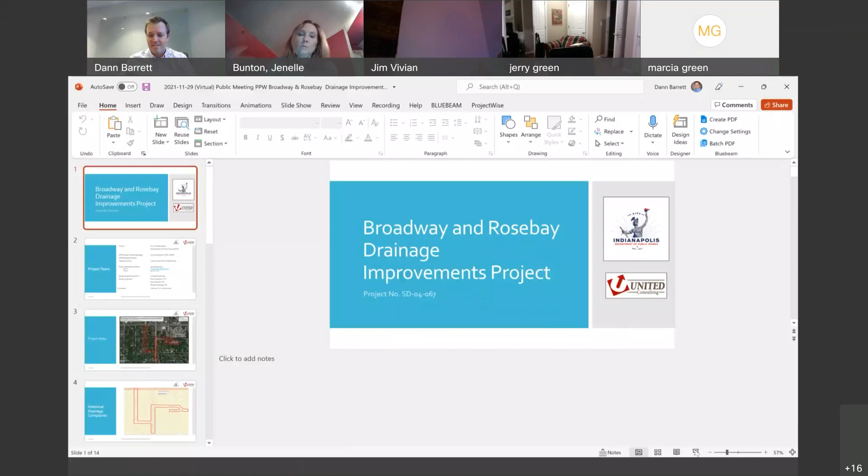Thanks, Dann. So as Jenelle and Dann kind of walked through, on screen you can see the team that composes the construction side and design side for this project. Just to add a couple more names, Leslie Jones with HWC Engineering is going to be the resident project representative, meaning the person on site for construction. As Dann mentioned, this project has been bid and awarded, and the contractor working this project is Calumet Civil Contractors. We don't have a contact person yet. We have a pre-construction meeting coming up next week to finalize the schedule and the personnel who will be on site working for this project.

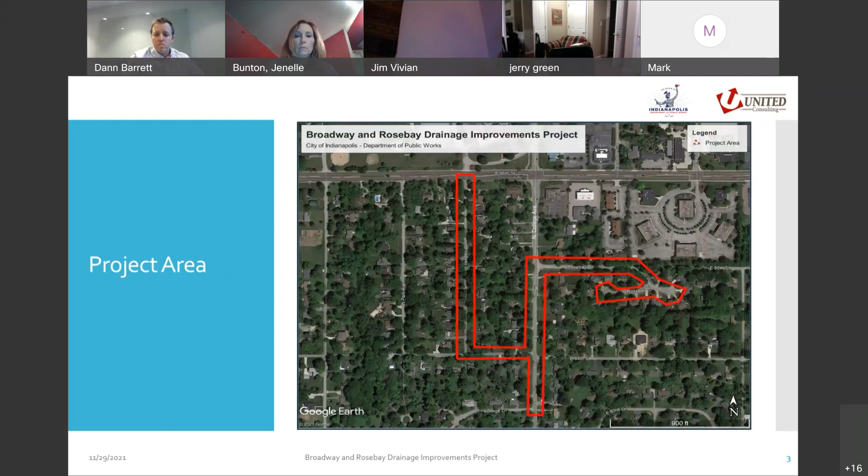So to give an overall view of the entire project area, we're going to be working primarily on Broadway Street between 86th and 84th Street, on 84th Street between Broadway and College Avenue, and on College Avenue between College Lane and Rosebay Drive, and the entirety of Rosebay Drive and Rosebay Court.

So how did we come up with this project area? Thanks to information provided by DPW and the resident log of complaints residents have made calling the mayor's hotline, we were able to take that information and do an on-site visit after storm events happen. With that data, we could understand where the focal points are that we need to address, and what the current drainage situation is for the site. For reference, Broadway currently has two-thirds draining south to a private drain located on the south side of the intersection of Broadway and 84th.

That eventually connects through private drainage and discharges to Holly Creek just south of College Lane. The northern third goes to 86th Street and follows roadside ditches.

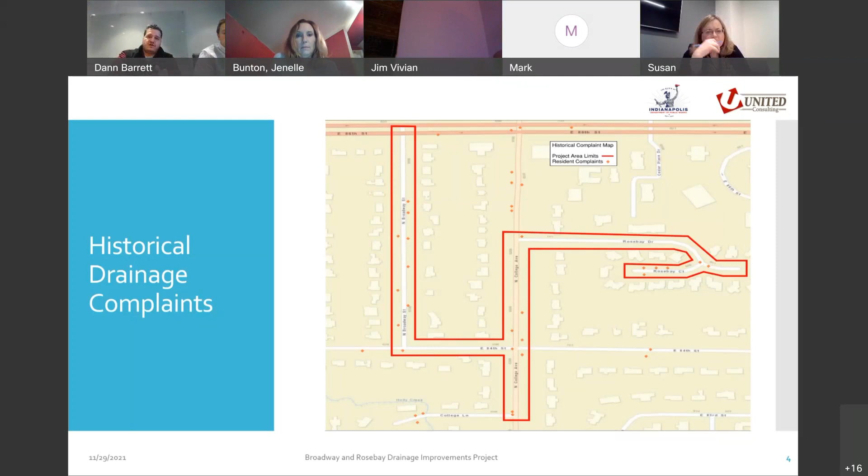These are some of the pictures we took during an on-site visit. This is Rosebay Court. As you can see in the images, there's a lot of ponding happening at the inlet where water is supposed to be draining through a pipe network system. On the right picture, we see ponding happening between two residences, even flooding into the nearby driveway. There's clear indication that action needs to be taken and a proper system has to be put in place to get that water moving from those locations.

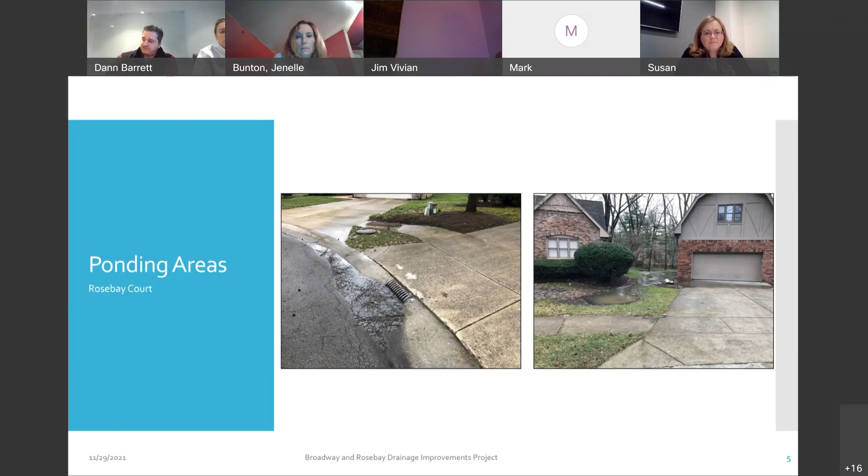Here we're looking at Rosebay Drive and College Avenue. Once again, we see water backing up on the left picture in the roadside ditch, almost overtopping it or getting close to the top, just at capacity or more. On the right picture, we see water just ponding on the road itself. Again, indicators that water is not going the way it's supposed to, hitting the locations it needs to reach, away from vehicles and pedestrians.

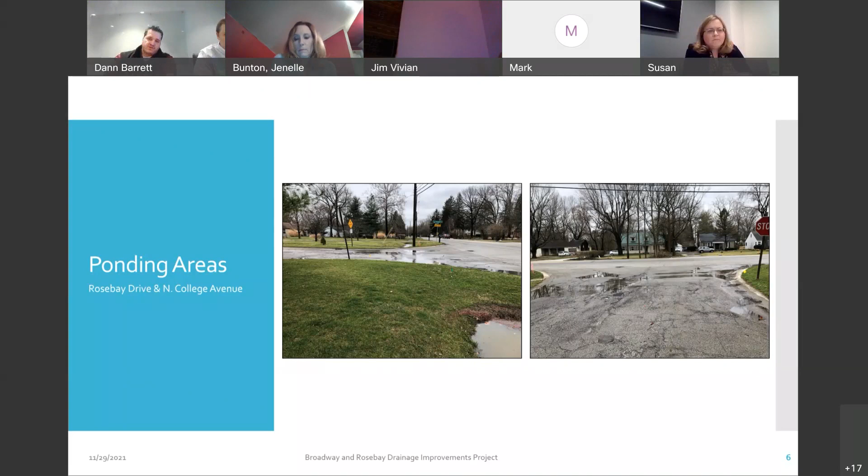What we see here is 84th and Broadway. Once again, water ponding in front of properties. There is an outlet opportunity close to the intersection, but due to lack of grading and insufficient entry for the water to drain into, water just ponds in front of the properties.

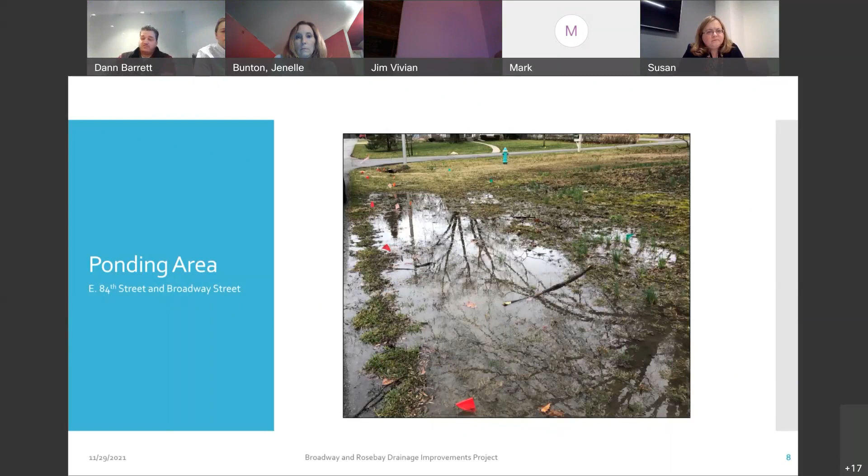Here again is Broadway Street. The GIS and the survey indicated that there is an existing system. Most of it might be plugged or not sized properly, therefore causing a lot of ponding happening in front of property owners.

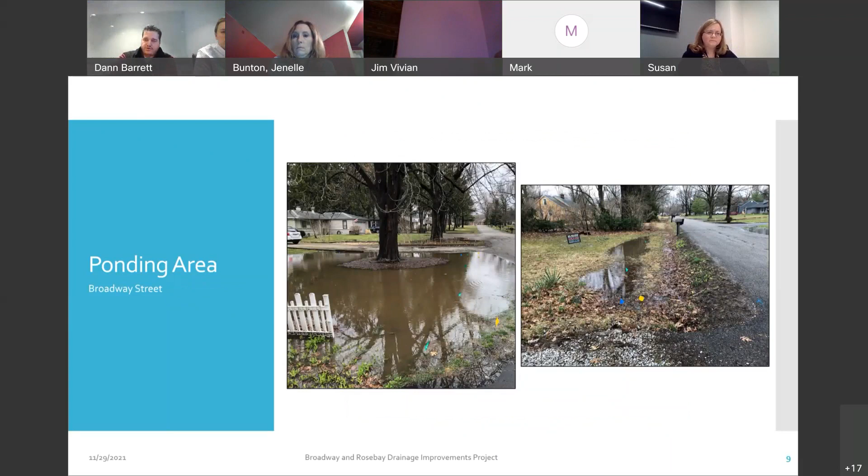All of this eventually drains back to the 36-inch pipe that runs on the west side of College and goes down to Holly Creek.

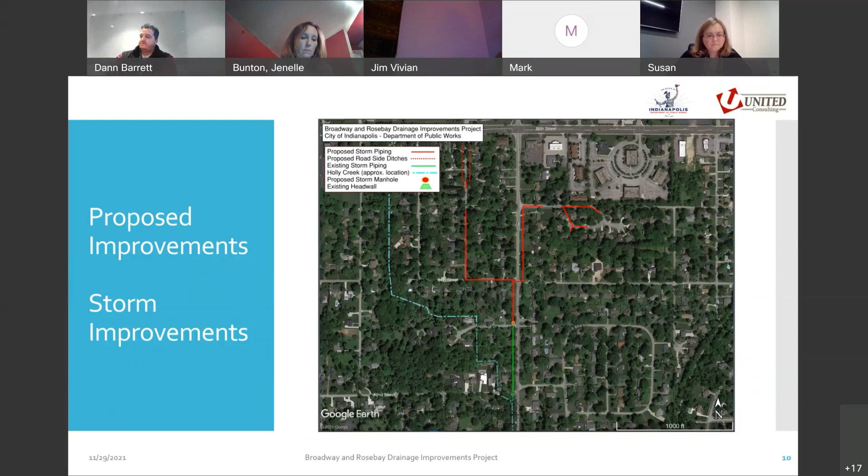One thing we want to note: through the construction, we will be utilizing an existing 20-foot drainage and utility easement that connects Rosebay Drive and Rosebay Court. We were looking at different alternatives, and this turned out to be the best solution for the proposed project with the pipes. There is a lot of conflicts happening with utilities, which we are working through, and we've notified all the utilities, so it's been an ongoing process with constant communication through that corridor.

As well, behind these properties, there's existing swales. Those are not going to be touched or modified. Those are going to remain in place. They're just going to stay there through the construction. No modifications will be happening to those.

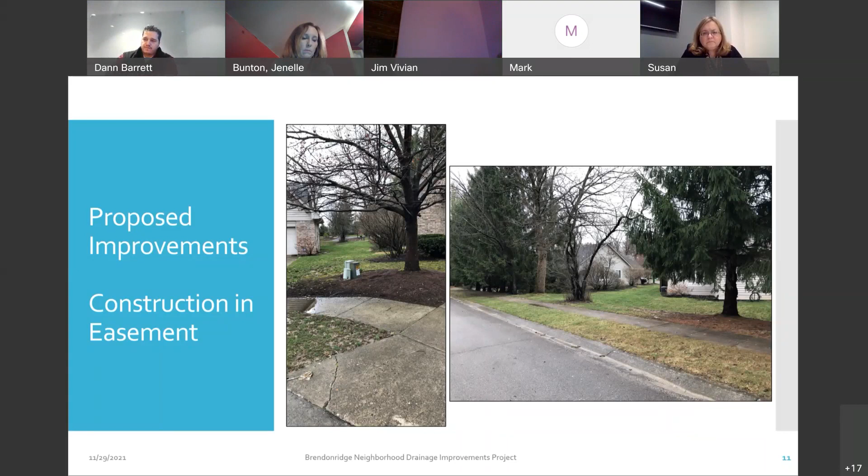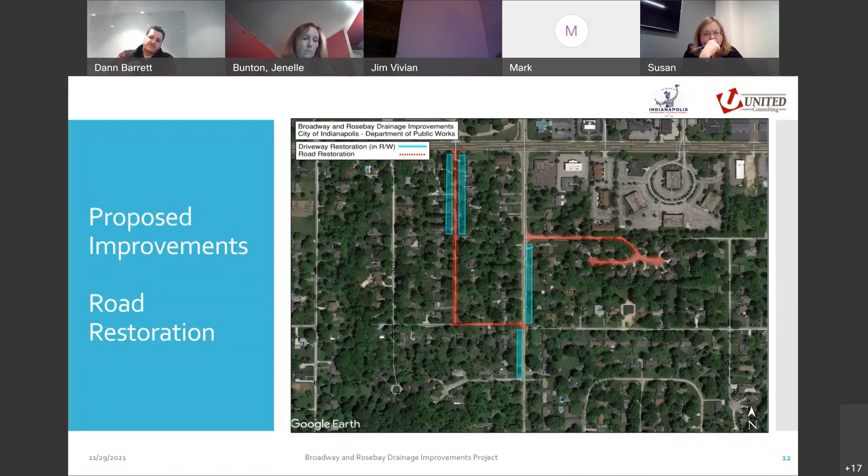There's also going to be drive restoration for impacted areas. The areas in blue are areas that are going to have drive restoration. That's due to restoring some of the existing culverts and driveways that are there that will be affected by putting a new pipe in, as well as drives that are going to be happening in Rosebay Court by going through the corridor.

Budget and schedule: the estimated construction cost is about 1.5 million. We want to point out the project is a local project, therefore funded and paid for by the stormwater fees. By spring '21, which already happened, survey and the drainage summary took place.

Public meeting in summer 2021, and following obviously this one as well. Through spring and the end of summer, we were finishing design completion. Permits and bid advertisement had already taken place in the fall, and it's been awarded. The goal is for construction to start sometime in the winter of next year, and construction completion happening fall of next year.

With that, that's kind of a quick overview of the entire project, the history of it, and what we're going to be doing. But now we're just going to open the floor to questions.

And I was just going to add, Gavin, what do you think about flipping through some plan sheets? Would that be a benefit to kind of highlight a little more detail on what we're actually doing in the Rosebay and College Avenue corridors? I think if you can run through that fairly concisely, I know there's a lot of detail on those plans. I can do kind of a high level. Why don't you see how efficiently you can just walk through the plan view, focusing on that. Yep, and I think that'll give folks an idea and might also help generate some additional questions. I can see we already have at least one. I think that makes good sense.

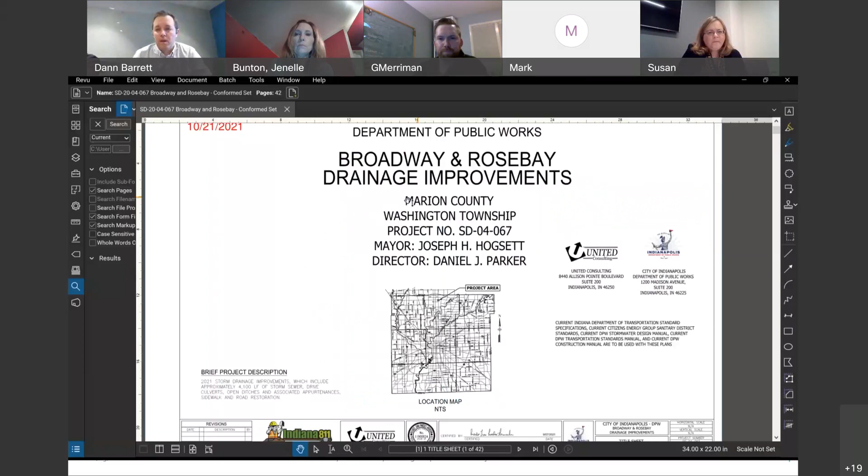All right, we're gonna kind of switch gears here. All right, so can everybody see the plan set here on their screen? Good. Yeah, so Ricardo gave a good overview of what the total project encompasses.

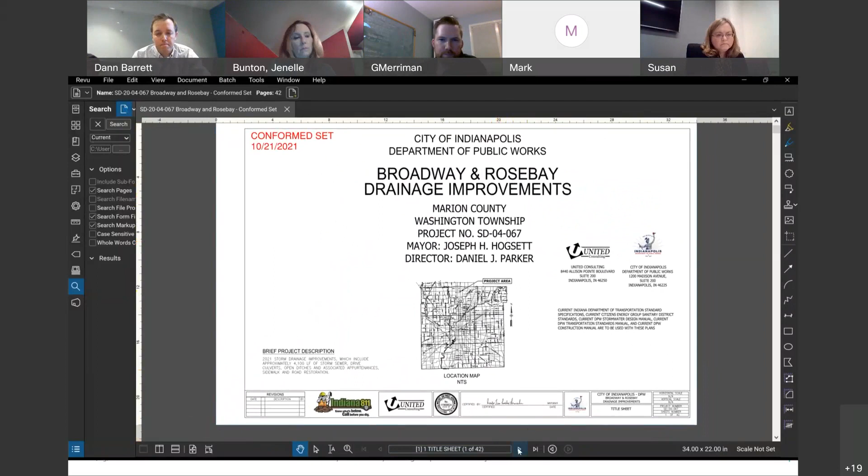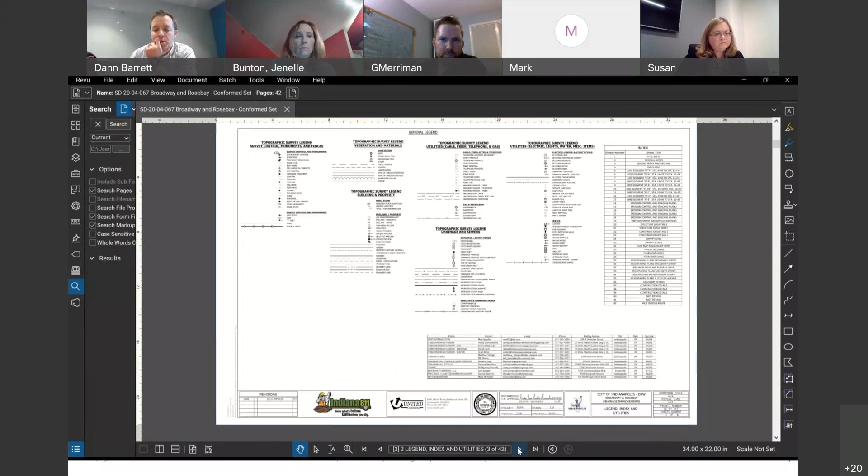Long story short, there's just some drainage outlet problems that we're solving with this project to get a much better positive outlet. We're adding inlets, adding infrastructure just to move the stormwater more efficiently out of these areas that have been plagued with ponding for quite some time here.

So I'm going to just flip through this first P&P sheet.

To orient yourself, this is College Avenue running north-south here, and we've got 84th Street. Our downstream outlet has a large inlet structure right here at College Lane that we're actually going to be hard piping and tying into.

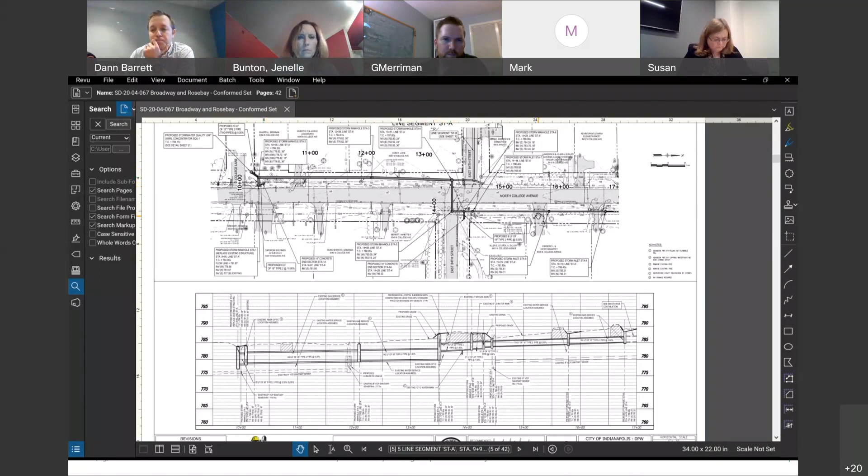This is that 36-inch pipe that runs clear down to Holly Creek. So what we're doing along College Avenue is we're actually going to hard pipe a new storm outlet along College Avenue, running from College Lane clear up to Rosebay.

We'll be on the west side of the road here where we'll intercept everything coming up from the north. Then we cross back over to the east side here to address the drainage deficiencies on the east side of College, and that'll ultimately be our outlet for what's happening in the Rosebay Drive and Rosebay Court areas.

So we're following along the east side of College Avenue as we come up. Right now there are existing drive culverts coming up through that area. Every house has a drive culvert, which again, with the lack of a positive outlet, a lot of those sit wet.

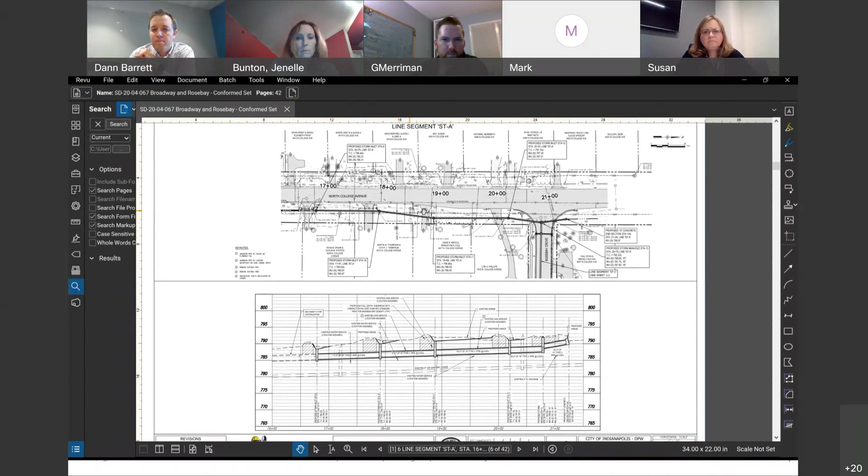With the new storm system we're going to be putting in, we're actually going to be eliminating the drive culverts in this area and installing a new hard pipe storm system. There'll still be an inlet on basically the north side of all these drives, and that'll serve as the entry point because we're still going to be capturing some surface runoff from what's coming off College.

So the east half of College comes here, and runoff from the properties will still come to that low point. You're kind of still constrained by existing grades, but the big difference is all the water from Rosebay and up to the north will be in that below-ground hard pipe system.

Once we get to the Rosebay Drive, College Lane, and College Avenue intersection, we've got an inlet to pick up all that stormwater that comes from the north, all the way up to 86th Street. And I'm going to keep going down.

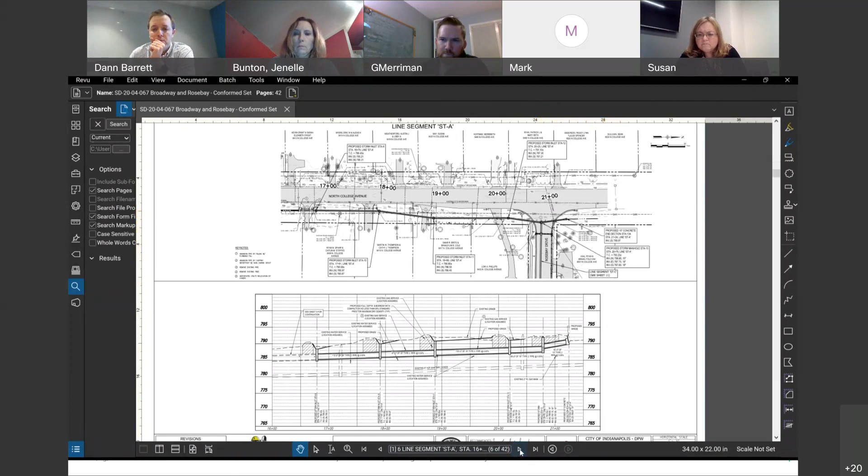We'll flip over to Rosebay Drive. Okay, so now we're on Rosebay Drive.

This is kind of a straight shot that we're coming in here along Rosebay Drive. On this one, the inlets were actually positioned correctly, and that's the same for all of Rosebay Drive and Rosebay Court. It's not for a lack of inlets at the low spots—it's really for the lack of a positive outlet.

So that's really what we're addressing. We're kind of hitting the root of the problem with this positive outlet. What we'll do is take all this water that would otherwise come into these swales and just sit there. Once that swale filled up, it'd start backing up onto the street through all the inlets because it had nowhere for that water to go.

And eventually—I think Ricardo showed a really good picture of this—there's a house on the south side of the Rosebay Court cul-de-sac. Eventually that system would get so full that it'd become the relief point in the system, and instead of water coming in the inlet, water would come out of that inlet, make its way through the side yards, get into the garage, and then continue south along the natural drainage path.

So that's really what we're trying to do here—we're still collecting at all these same inlet points, but we're taking it to a more efficient, more effective outfall instead of relying on that existing infrastructure. Through this corridor we've got existing inlets, and we'll be replacing all of those with a slightly bigger inlet structure for more efficient capture.

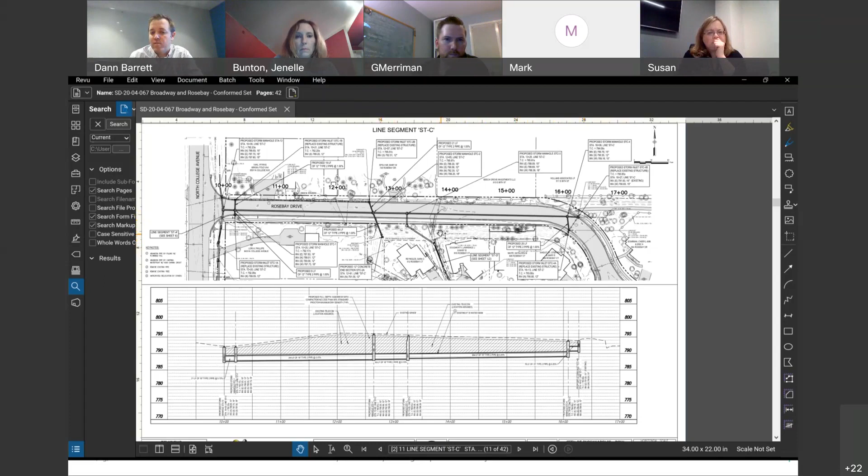We're intercepting that before it dumps in there. We'll have new outlets at the bottom, at the west end of this swale, at the middle of this swale, that's going to take it out to our storm system. So we've got a much better way to actually drain that. And then I'm going to go to the next sheet.

This talks about the easement corridor that Ricardo had mentioned, between 812 Rosebay and 818 Rosebay Court. As Ricardo mentioned, that is a platted 20-foot drainage and utility easement, meant for drainage, exactly what we're doing here. There's actually an existing drainage line that served the subdivision when it was installed, and we're basically putting in a new pipe in that same corridor to replace the old drainage line. We're going to upsize it and flip it a different direction.

This is what I was talking about earlier, where that existing system would come to this inlet right here on the south side of the cul-de-sac and bubble over. Now we're taking all this flow and bringing it back up north to Rosebay Drive, out to College, and then down to Holly Creek.

It's a tight corridor there. We've had to work hard with all the local utility companies in the area. We've got some utility relocations where notice to proceed has been issued. There's going to be some relocation there just so we can get the drainage pipe put in where it needs to be at the depth it needs to be. But again, that's the clearest, best path for us to go through that corridor and serve what it needs to do.

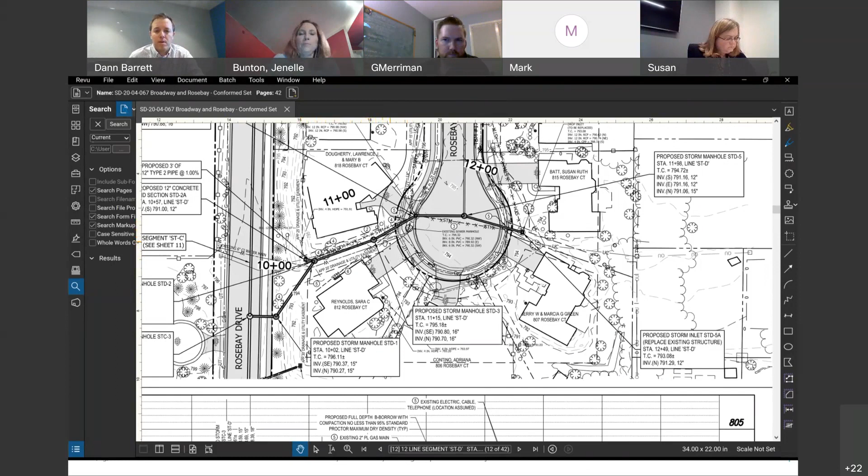Then the only last piece on this is just coming down Rosebay Court a little bit. There's a couple of existing inlets here, just to the east that, again, we're going to tie back into our system, get to our new outlet as opposed to relying on this old piece here.

So I know that was pretty quick, but hopefully that helped paint a little better picture as far as what we're looking at. I guess at this point, I'll just turn it over to questions.

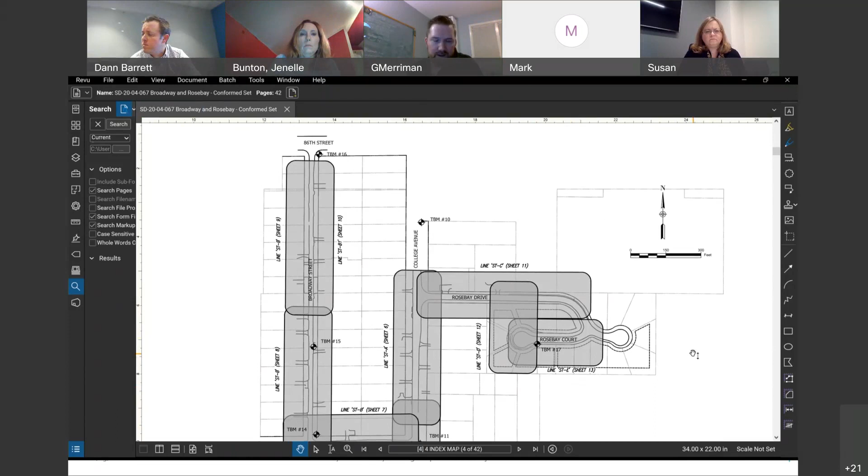As you can see from the exhibit on your screen, right now this does not extend all the way up to 86th Street. Essentially we've focused on these key areas in terms of the Broadway Street corridor and the Rosebay Common subdivision, and in taking the improvements down to Holly Creek and doing all the restoration associated with a project like this, we frankly just ran out of funds available for this work.

So as far as those issues on 86th and College, if complaints have been submitted to the city, those are on record. Oftentimes those are best addressed when there are other projects in the area, like transportation projects, that can have drainage improvements incorporated within them. But as it stands now, I don't know of any specific projects in the works to address that area. So I would urge people to continue to bring those issues to the city's attention through the appropriate channels, whether through the Mayor's Action Center or calling Citizens Energy Group to report drainage specific complaints. And then hopefully eventually we'll get some attention at some point.

The next question here is, how will the new system connect to homeowners' storm sewer piping, and will there be a cost to homeowners, and will swales be dug on Broadway in addition to the new piping? I think this is primarily associated with the Broadway portion of the project.

There is no dedicated connection of homes, or really shouldn't be, to storm sewers. This is a separate storm sewer project, really just for rainwater, and this infrastructure is in the public right-of-way along roads, designed to pick up drainage from the roads and, to the extent possible, from adjacent properties.

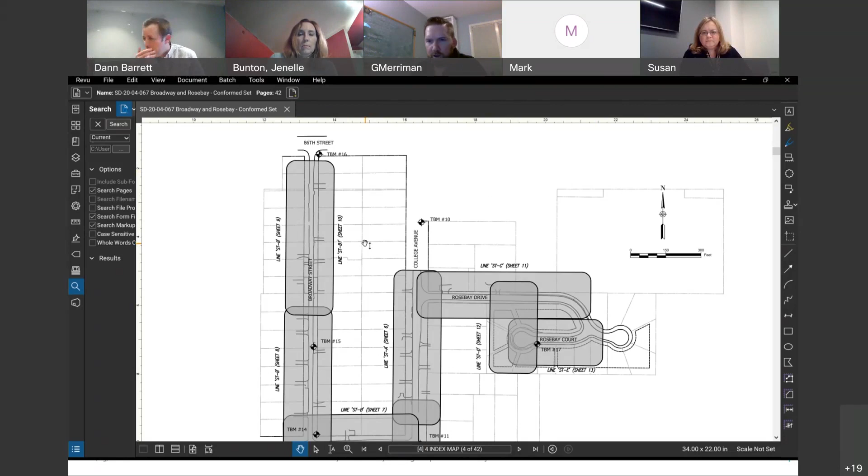All right, thank you, Dan. The next question, and we'll probably need you to bring up the corresponding plan sheet, Dan: please detail the work that will be done between 84th and College Lane. Will the ditch remain with a pipe next to it? At times, the volume of water going into the 36-inch opening overloads several times during most years.

I'm going to speak to that generally, and then I'll let you show them how that's going to work out. With drainage, anytime we size a new system, we can only size it to a storm of a certain size or magnitude. Often storms are described by their recurrence interval, a storm that typically would recur on a 2-year interval, 10-year interval, 100-year interval. So there are storms that will exceed the capacity of any system.

With new subdivisions, those are often built with detention. That's why you see ponds and things like that to provide storage for some of those larger events, to hold water so it doesn't overwhelm the systems. They also typically build them with emergency flood routing design, to where they know the elevation of every home and where that water is going to go in a situation like that, and they actually design the areas like that.

For a storm sewer retrofit project like this one, if we could rebuild the entire area again, we would do things differently. Typically these areas are built by developers and then the infrastructure is accepted by the city. But you don't have opportunities like this to put in a pond—there's not an acre of spare land where we can just drop in a retention pond. So unfortunately, in some cases, we're just limited in terms of trying to make things better, putting in the best system we can with the limitations that exist in terms of space and in terms of balancing making things better in existing areas without causing or exacerbating problems downstream.

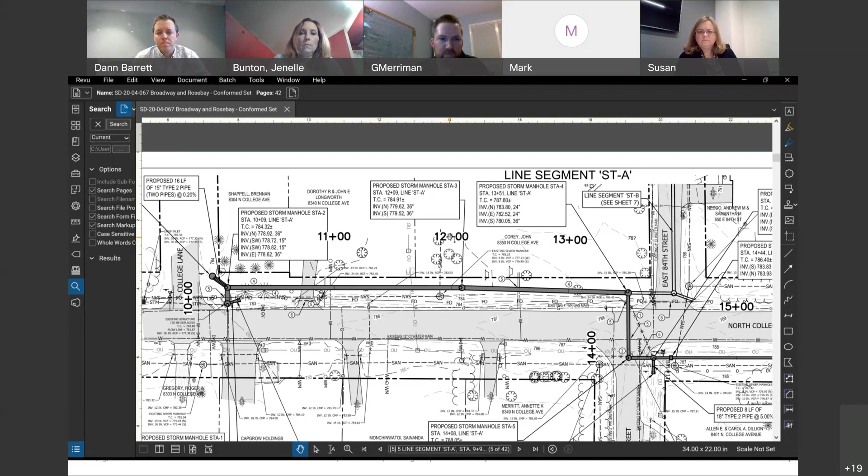Again, with the limitations, knowing that we can't do things like we would in a brand new development where some of those additional measures can be put in. So there are often limitations with some of these projects, but I'll let Dann highlight the area there. If you can speak to how things will come together and function in that area, existing versus proposed, that'd be great.

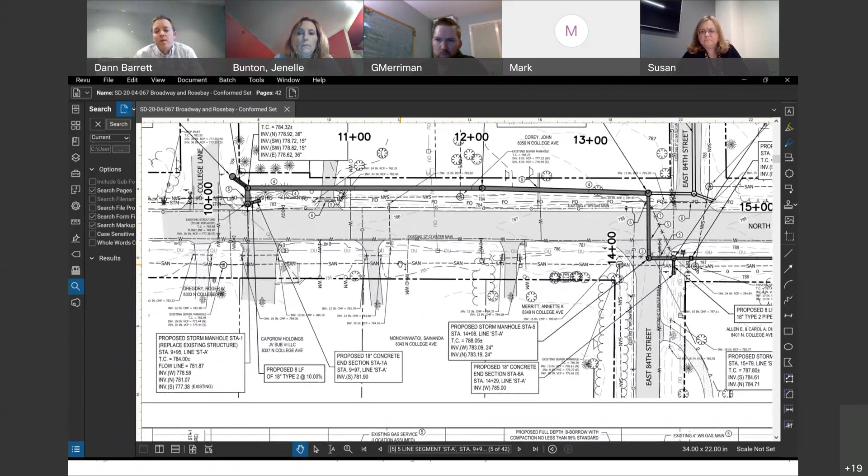Yeah, very good. Can everybody still hear me? Okay, perfect. Gavin hit the nail on the head talking about design periods and return periods. There's always going to be a bigger storm. You might design for a 10-year return period, which is what we've designed for here, so basically the size storm that's going to occur every 10 years.

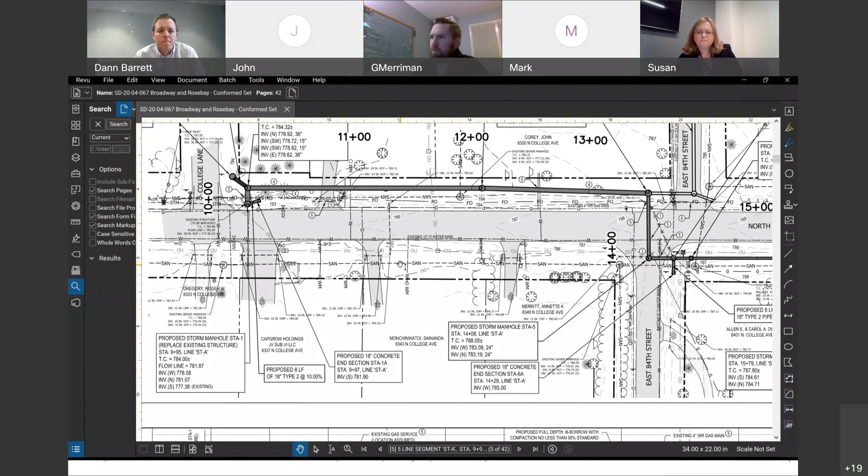But as we all know, okay, hang on. This is John Longworth, and I'm talking about what happens at least once a year, and sometimes water comes out of the ditch and goes around both ends of my house on its way back to the creek. So if you're taking care of things that happen every 10 years, then it should take care of my problem. But I'm concerned that you're just going to dump more water on us from up north and just make our problem worse.

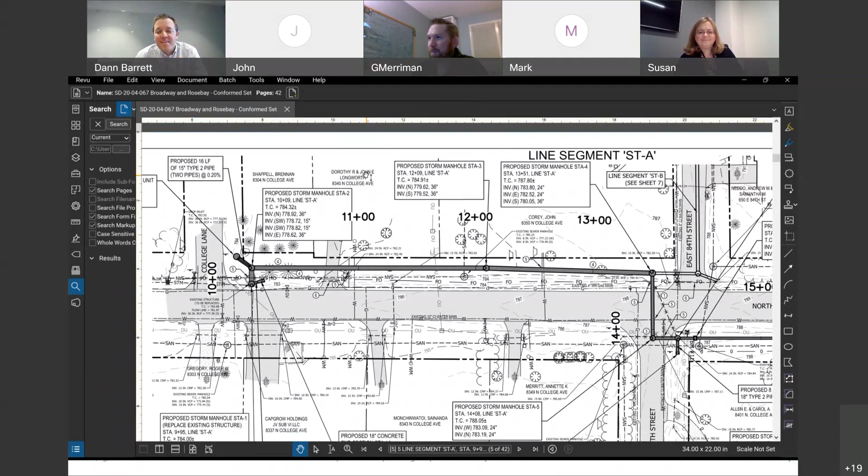About 3 years ago, for the first time ever, we had water running in our garage. It had come out of the swales that are at both ends of the house and was running down our driveway and splashing up and left mud over a foot high on our garage door. So now we have everything in our garage on stilts, just because of that. So we certainly don't need any more water here.

Well, let me talk about what we're doing here, John, and maybe that'll paint a little clearer on how we're going to handle this. Right now, what we've got is all of the water from 84th Street north along College, that includes everything along 84th east of College, everything north, clear up north of 86th Street. It all funnels down into this one open channel here.

So what we've got now is, currently it all runs in this open swale next to College Avenue. And then there's a large, like a 5 foot by 5 foot grated inlet structure where all this water has to get in through that grated structure to make it into that 36-inch pipe. What we're going to do, instead of relying on that one inlet structure, we're actually going to extend up the 36-inch pipe all the way to basically the intersection of 84th and College, and all that's going to be captured into that 36-inch pipe.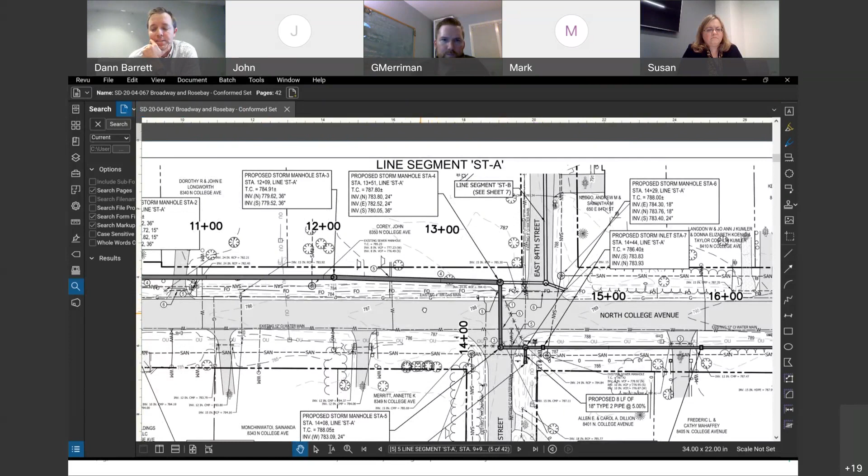Okay, so there's not any greater capacity south of College Lane, though. There's not, and that's kind of what Gavin was talking about. You're designing within the constraints of that existing system, and it all comes down to budgets and where you draw the line. We do have a good sized pipe, 36-inch pipe that runs here down towards 82nd to an outlet to Holly Creek, and we did model that looking at the 10-year return period for that drainage area. Again, that covers all that, up to 86th Street and beyond. So this has been for the 10-year return period.

Again, there can always be a bigger storm, but we do feel we've got a much improved capture point that's gonna improve getting water into the system and draining these areas.

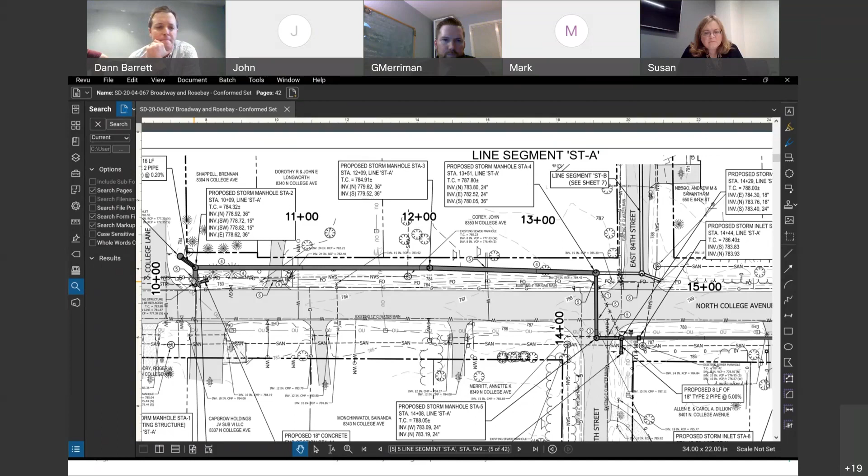Okay, I'm just wondering whether I need to put a dike around my house. I'm really concerned about it. We'll see.

Well, I'll tell you, I can add one additional thing to what Dan has explained here too. In the existing situation, you're relying on that single point of entry into the system right next to your property, and it's also a grated structure. So anytime you've got a single grated structure like that, it probably doesn't take a whole lot of debris to start damming things up a little bit.

Is that pretty accurate, especially when you get into fall with leaf litter and things like that? Yeah. It belongs to the neighbor, but we go out and clean it most of the time, although the latest neighbor is a lot more help than some of the previous ones.

Well, that's the reality of it, is we do rely on the residents of Indianapolis to help be good stewards of the drains near their property. But as I'm sure you experience routinely, it doesn't take a whole lot of debris to block up a single drain. We've gone out there during storms in the rain to help keep it clear, to keep the water out of the house.

So part of what this also does is eliminate that issue and makes a more distributed system. And it's not just multiple inlets distributed throughout this area, but you also have all that additional underground pipe infrastructure, which does provide some capacity. It's not detention per se, but it is underground capacity for this drainage, and it also changes the dynamics of how quickly things move and the peaks and valleys of a given rain event and how the system responds.

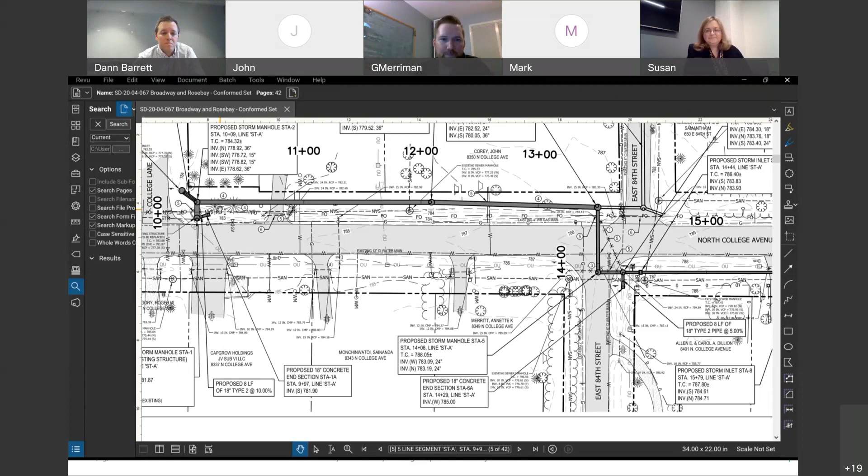It doesn't sound like you want them anyway. We'll have to look at it. I'm gonna talk to the neighbor about not putting them back because they're so close to the street that they block the view of traffic, and it's a little harder.

We have a tree mitigation or replanting plan. We do try to put trees back because Indianapolis is a Tree City USA and has goals and requirements for replacing trees in the public right of way. But we try to find places that won't conflict with the new infrastructure and utilities, and of course we don't want anything that's going to be a vehicular hazard. He was talking about putting some more trees in the yard there, so maybe he'll want them back a bit, just a few feet anyway.

Well, we very much appreciate your questions and comments. Do contact us if there's anything you'd like to discuss in greater detail offline, outside of this meeting. Looks like we might have a few more questions here. Give me just a second.

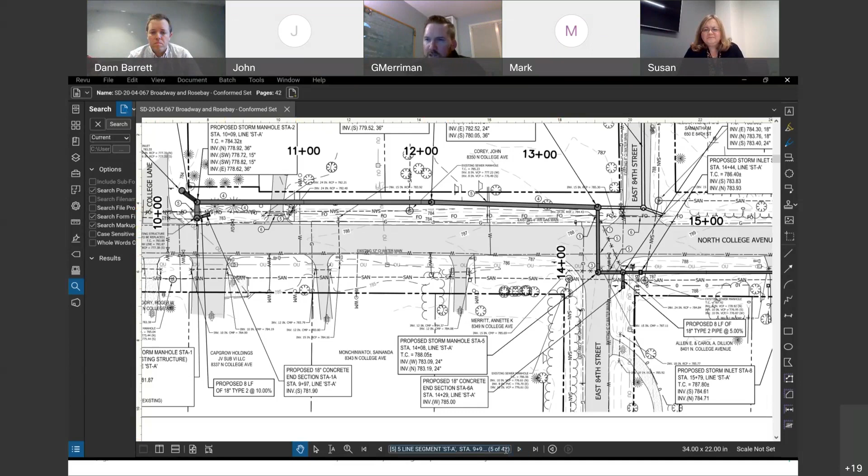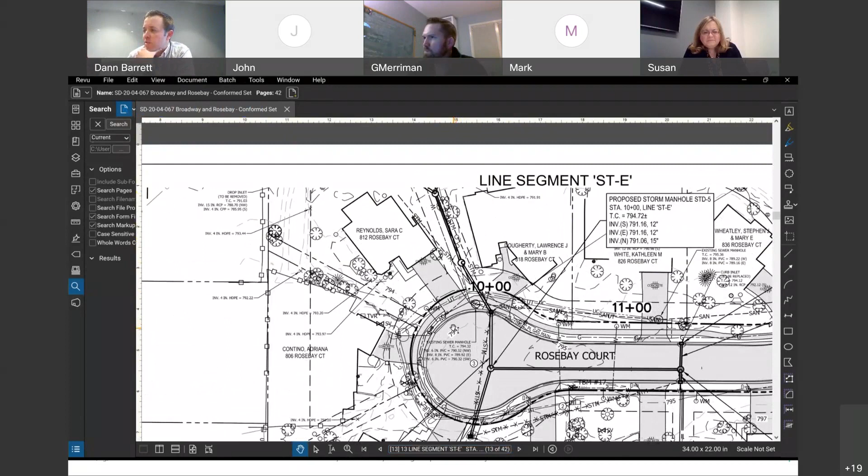There's a question about whether there'll be work or yards being impacted between 812 and 818, that's Rosebay Court. That is correct, that's the easement area we're running through. The other part was, there'll also be some work in the area between 807 and 815, on the south side of the cul-de-sac. That's where that existing inlet is, which has been overflowing and running to the south. So we are going to replace that inlet and pull flow to the north. But that's as far as we're going in that area, just within the easement limits, just beyond the right of way, nothing any further south than what you're seeing on this screen.

That pipe where the inlet is, between 807 and 815, is it maybe that it doesn't go out, it's just constantly clogged, with gunk at the bottom? Will that be cleaned out so whatever is there can flow out, or will it just naturally clean itself out? How does that work?

So what we'll do, we actually did some televising through this area to take a look at those outlets to see where it goes, and you're exactly right, we got the camera about 30 feet down and then it just stopped. By putting the new inlet there and redirecting all that flow, we're no longer going to be relying on that pipe for anything, so it's basically going to be abandoned in place. Once all that stormwater is going somewhere else, there's no longer a purpose for that pipe. Generally it's not worth the money and disruption to dig it up. It'll just be abandoned in place, and we'll cap the end of it, seal it up watertight, but it'll be left there. Good question.

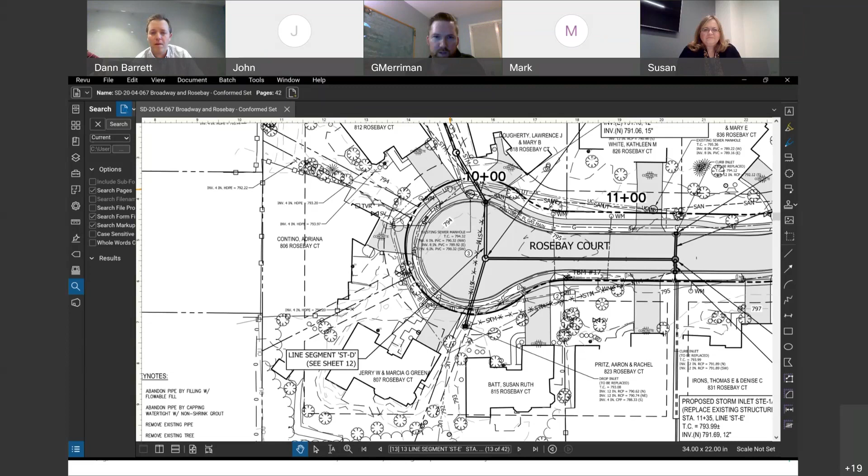Generally those utilities, this question comes up a lot, and utilities are an entity the city unfortunately doesn't have a great deal of control over. I apologize if there's anybody here representing a utility company. They do a lot of work and put forth time, effort, and expense to work with us on these public projects, because essentially they have to get out of our way if the city wants to use its right of way for public improvements like these. But if utilities do have to relocate, including that drainage and utility easement corridor between those two properties we discussed, they should take the same approach we would if there's a direct impact to a property owner, especially a service disruption - they need to be notified in advance. That would be my expectation. These are companies that serve customers throughout the city and beyond, so they have their own protocols and practices for how they approach those things.

From a customer service standpoint, you are a customer of these utilities. They are there because they're serving your home and providing services to you. So I would hope that they would have a similar approach that we do as far as notifying folks, especially if there's going to be a service disruption.

On the other hand, sometimes if they're operating within a utility or right of way where they have a right to exist and shouldn't have a direct impact on you, like a service disruption or blocking access to your home, they will just do what they're within their rights to do and do construction work.

So for direct impacts, significant impacts, I would hope they contact you directly. Otherwise, if they're just out in easements and right of way doing work, they often just work as they're entitled to within those areas. So I hope that somewhat answers the question, but yes, I hope they're not cutting off anybody's service temporarily without notifying them. I certainly would hope they would not do that.

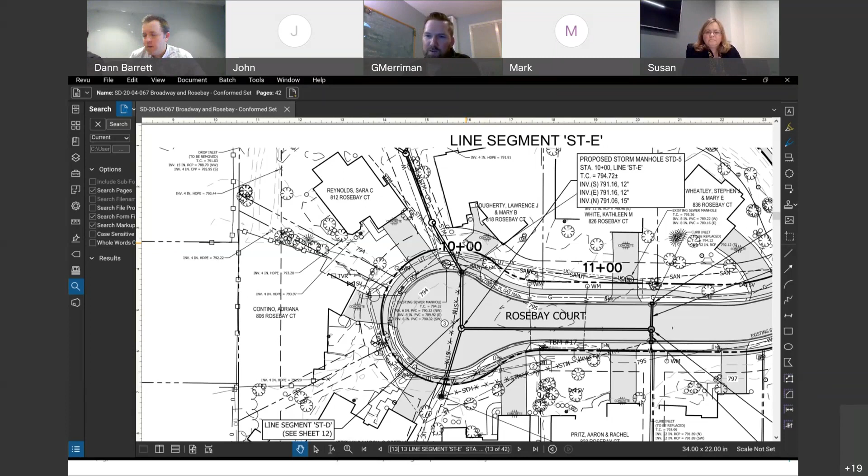Here's one, Dan, this might be running through the project specifics here. What is the size of the pipe on Rosebay and how far underground will it be placed? I think we have someone that wants to see the profile. Let's see the profile. Yeah, I like it.

So in Rosebay, at Rosebay Court, at the upstream end, we start out with a 12-inch pipe. And then as we get further down, we come up to an 18-inch pipe, the largest size we've got. I was just showing you the plan view, but I can show you the profile view as well. At the upstream end we get pretty shallow, probably in that 3-foot depth range, but at our deepest point we get to 8-9 feet, at kind of the hump there just east of College.

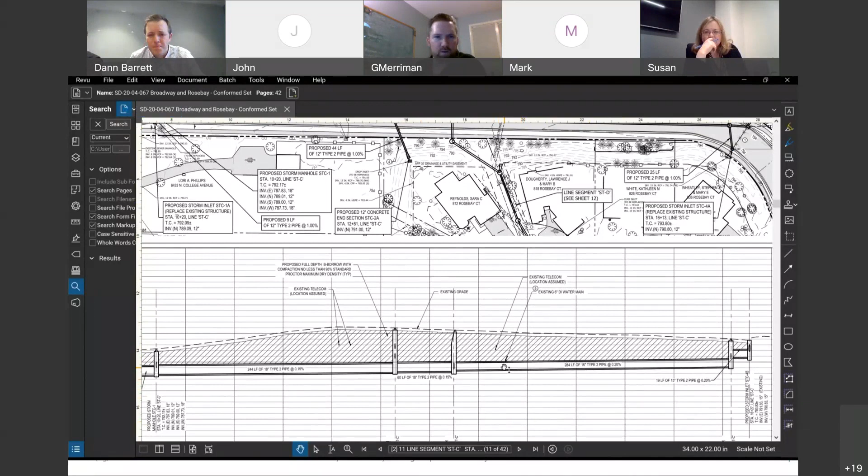So again, we tie into the system at College. It's an 18-inch, and then it kind of reduces size as we've got less draining into it. So it's a 15 as we get up to this corner, and then we come on to Rosebay Court, we've got a 12-inch there. Dann, actually, you're on the right sheet here. Will you go up to north and west of where you are?

The next question is: is it anticipated the culvert running under Rosebay Drive north to south will be replaced? Apparently that's the one that's silted in, conveying drainage from north to south under Rosebay Drive just east of College. Yeah, so what we're going to do is kind of similar to what we looked at just a little bit ago at 84th and College.

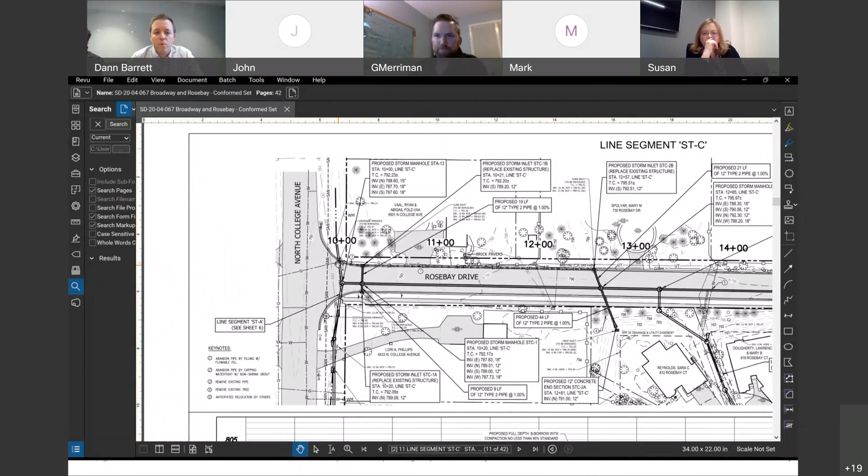So we're going to basically improve the connection points. There's an existing culvert that runs here and ties into the system. What we're going to do is tie that directly into our new storm system. So there's going to be a new pipe, a new end section that extends north of Rosebay on the east side of College. I believe it's a 15-inch pipe that will tie in.

And again, by getting a better positive outlet, that should limit the reoccurrence of sediment and siltation in that area, because the water shouldn't be sitting for prolonged periods of time like has been experienced.

Okay, and the next question I have: will you please clarify the timeline of the project? So I can speak to that a bit. We have not even had our pre-construction meeting with the contractor yet where we get their specific schedule, because we have assumptions on how they will tackle this thing.

But ultimately, the way things are set up, they have a contract with certain completion dates, and they're contractually bound to meet those, with few exceptions that could cause extensions if things come up during construction. As it stands now, the substantial completion date, where everything should essentially be done in terms of work out in the field, is the 16th of September, 2022.

So we talk generally in terms of a fall completion, and their final completion is coincidentally Halloween, where we expect them to have all punch list items and little tidy-up things done, to where everything is completely done—grass replanted, things stabilized, all the pavement work done and everything by that point.

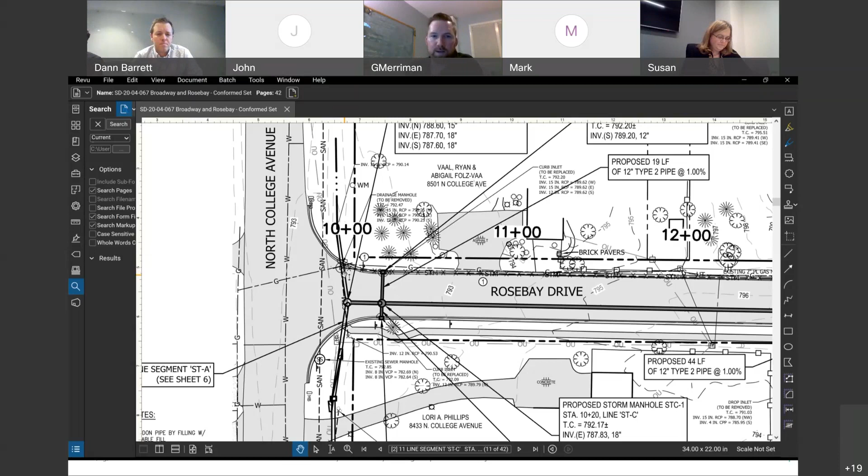What you guys might start seeing in the field are those utility relocations that we've talked about. We've given notices to proceed to utilities.

So those utilities, we hope, will be starting work anytime on relocating water lines, gas lines, telecommunications. We want them out of the way before we start work. My expectation is over the next 60 to 90 days they're getting their work completed and wrapped up to get the site ready for our contractor to move in and complete work on the project. There could be some overlap if our contractor gets started early and has places they can work without conflicts, so construction on our storm sewer improvements by the DPW contractor could start as early as January of next year.

I would not expect that, though. I would expect more of a late February, maybe even into March, before our contractor really gets going with work on this project. Now those are all tentative timelines—we don't have an actual construction schedule submitted from the contractor yet. But we'd expect some utility relocation work to start anytime in those areas where they need to get out of our way, and then our contractor would move in early next year and get to work on the project, and then they need to have it wrapped up and completed by fall.

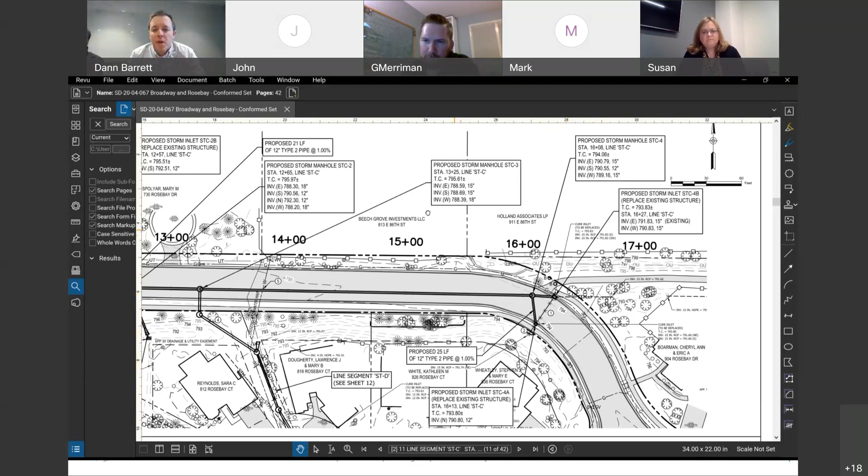So with that, I don't have any other questions in the chat. I see one more in there, Gavin. Sorry to interrupt, there's one more. It's kind of a follow-up about the culvert. It looks like there's a question about the culvert further east on Rosebay near the curve, so I was just going to pull in and show you this area as well. I believe this is the culvert being talked about.

There's a 15-inch concrete pipe that picks up a little bit of open drainage here. Again, this is getting beyond the city right of way, and that pipe comes into the inlet, into the swale. What we're going to do is propagate, or continue, that drainage. But instead of this water coming into the swale, it's going to come straight into our new inlet here and into our storm system. So we're not actually going to be replacing this pipe or doing any sort of new end section here. That also keeps us from getting into all these trees and landscaping, and also keeps us inside public right of way. But again, we will be picking up that pipe to continue that drainage and get it to a more efficient drain path. Hopefully that answers that last question.

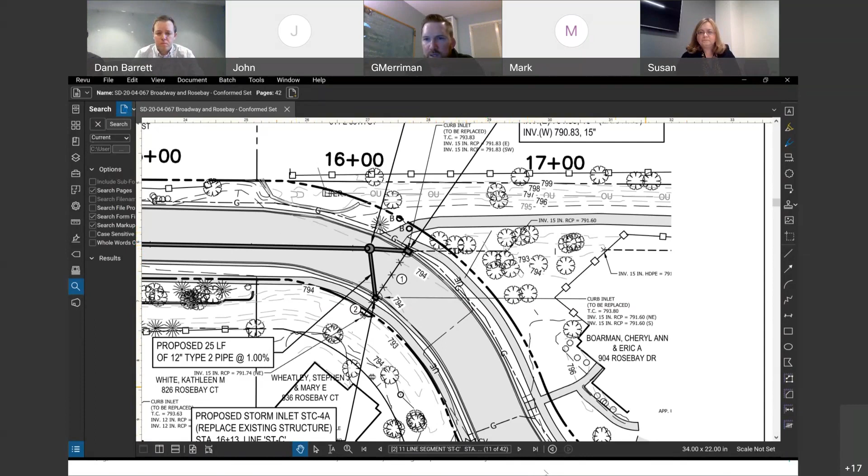And just so everybody's seen it, I want to make sure Janelle, our public information officer who has coordinated this meeting for us, has also put her contact information in the chat. So if you have questions that come up after the fact, you can reach out to Janelle and she can get that information for you. I also have the project's RPR, basically our inspector—her name is Leslie Jones, she's with HWC. We could share her email address if that's helpful, or I don't know if there's any follow-up we can send to an HOA representative. But that is a person folks can reach out to during construction with construction-related questions. Maybe I'll just put her information in the chat here real quick.

Yeah, this is Steve Wheatley. Can you hear me? Yes, Steve. Oh okay, great, thank you. I don't know if there were any other questions.

I just wanted to, on behalf of Rosebay Commons, say I'm thrilled to see so many of our neighbors on the call tonight. I want to thank especially Janelle for putting this together, and Dann and Gavin and the whole team there—you answered a lot of questions. Personally, I'm cautiously optimistic. We have a lot of hope that this is going to improve the longstanding drainage issues, and I look forward to the project starting. But I want to thank you all for coordinating this. Well, thank you, that's very welcome.